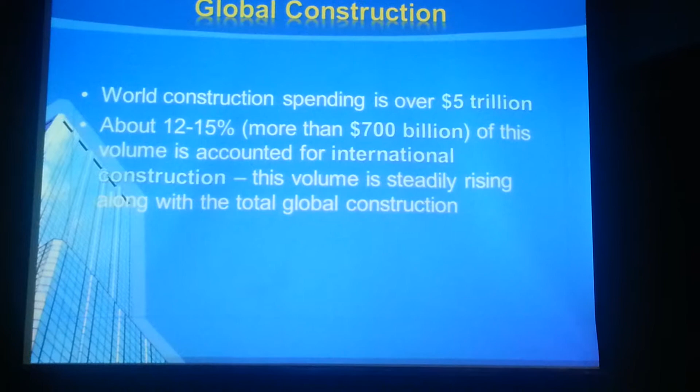Now, do you think that amount is increasing in terms of percentage or decreasing? What do you think? Anybody? Increasing. And it is increasing in this way.

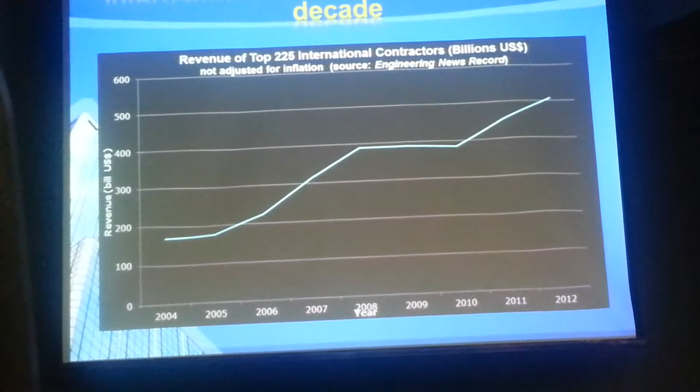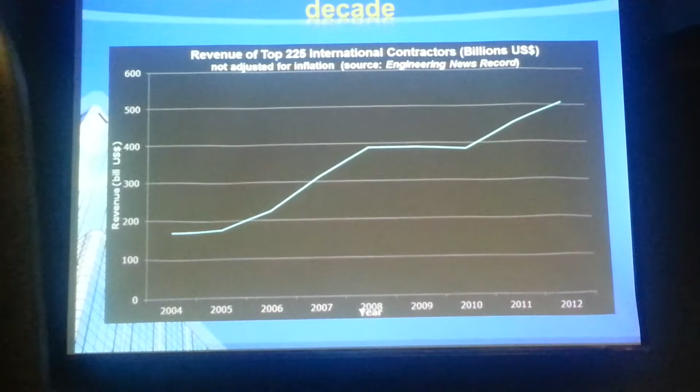I teach a course in my graduate program, Topics in International Construction. And I have been observing the trend of the volume, and this is what I've seen. And of course, I think you will know why there is a flat portion from 2008 to 2010, right?

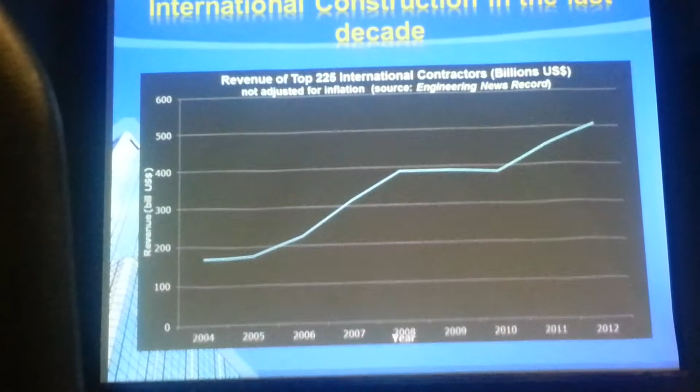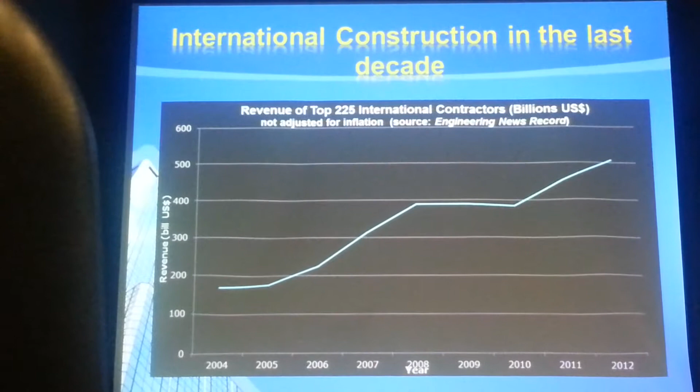There has been a global recession. But still, it didn't go down. You see that it didn't go down. These dollar figures are not inflation adjusted, which means this is the actual volume of dollars that have been spent. And it didn't go down during the recession period. And now it's going up again. And the latest figure in 2012 is about $500 billion, US $500 billion.

Why is this happening? As I asked the question whether it's increasing or decreasing, I think you agree with me that it is increasing. One of the reasons it is increasing is the push for project scale. The volume and the size of some infrastructure projects are becoming very, very large. And there have been economies other than developed countries like G7 or G8. There are other economies that are growing. For example, BRIC, and their GNP is increasing, so there are bigger and bigger infrastructure projects coming along.

At the same time, there have been breakthroughs in technology. We don't see most of that, but the technology that has been increasing that we have been observing is in the information and communication technology, which has nothing to do with construction, but it is helping construction. It is helping to undertake bigger and larger construction.

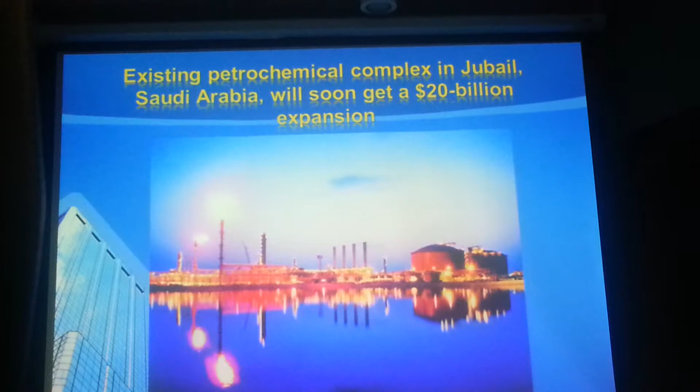I'll give you a few examples, and these examples are featured in Engineering News Record. This one is in Saudi Arabia, $20 billion project. So think about the volume in terms of just money. There are many third world countries whose annual budget is not $20 billion, but this is one single project.

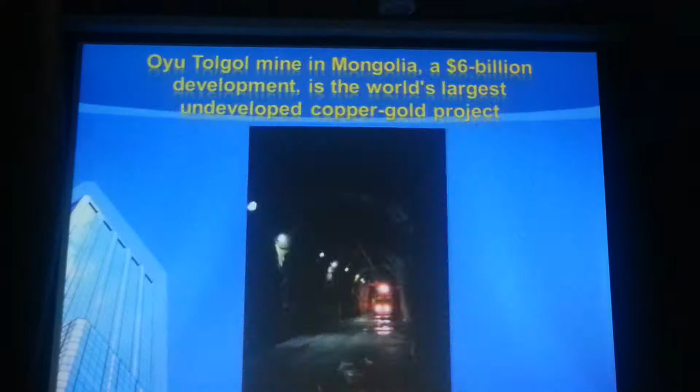There's another one in Australia, which is a $15 billion project. It's a liquefied natural gas facility. And there's one in Mongolia, $6 billion project.

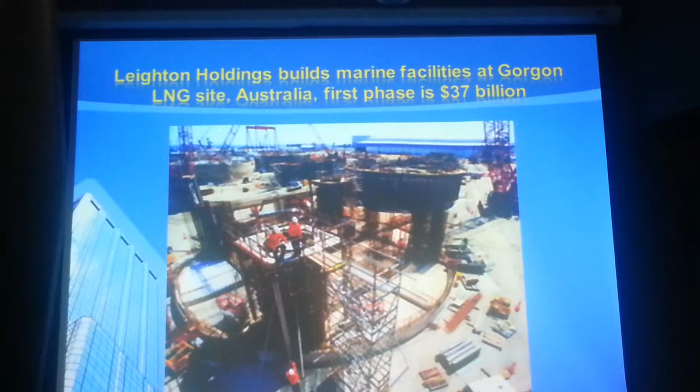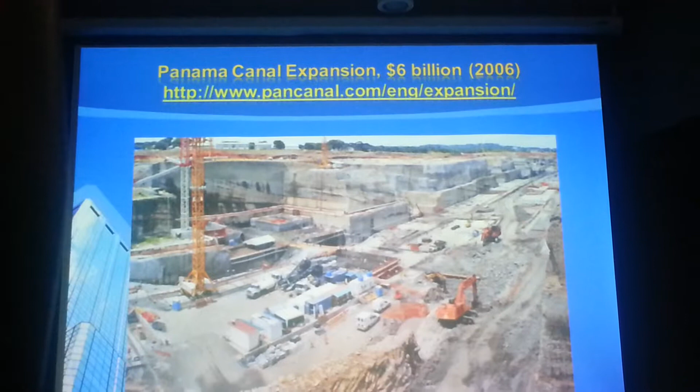This is the Panama Canal expansion that started in 2006 and is finishing either this year or next year. It's a $6 billion project.

So what role is technology playing in this? There are several kinds of technology or technological innovation that we are witnessing. Of course, I mentioned one is computing, information and communication technology, and automation. There are two different kinds of applications of computing technology. One is information, in the field of information and communication. Another is automation, maybe you can say robotics. These are the two different types of computing technology that we are seeing.

And then, of course, we are also seeing push for innovative construction materials. Now, the first two, computing and innovative materials, I want to emphasize these two words. One is process innovation, another is product innovation. I'll come back to this differentiation between process and product in construction. It's a very important differentiation.

And then we're also seeing technological breakthroughs in high-rise buildings and infrastructure construction. Some of the examples you have already seen when I talked about those giga projects. They're not called mega projects anymore, they are called giga projects. They're so big. Now, a little more contextual information.

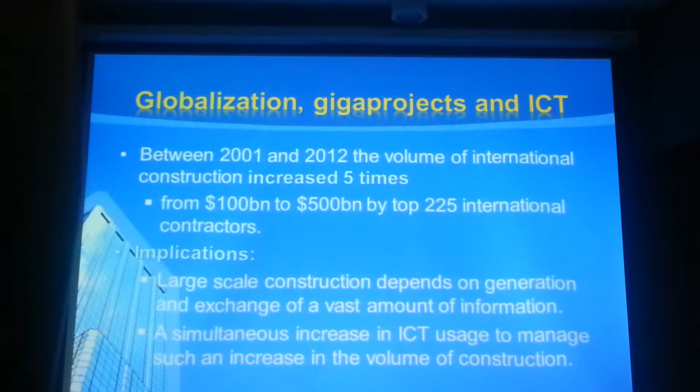What is the implication? The implication is that even if it is not directly, indirectly you can say that in a large-scale construction project, there will be more information exchanged and processed. Naturally, in a construction project, you will have to know how to generate, store, and exchange information among the participants in the project. It's very important, and that's why we are seeing breakthroughs in ICT, or information and communication technology. So a simultaneous increase in ICT usage to manage increase in the volume of construction is what we will see. So that's kind of a direct relationship.

Now, I'll give you a few examples of what we have been hearing as BIM, Building Information Modeling. Have you heard of this term? BIM, Building Information Modeling, which is a direct byproduct of information technology that I talked about. So BIM, also known as virtual design and construction, is changing everything in the way we now communicate in civil engineering and construction engineering field.

Now, you don't have to read all of these things. I highlighted some of the items there—database technologies and graphics and simulation technologies. These are very high-level computing technology, and now we are seeing applications of them in construction.

We're still not seeing very sophisticated applications, but we are seeing them, and it's increasing. We are also seeing how BIM is being used to assess the building life cycle, constructability analysis, as well as to provide a framework for an interactive information system. I'll give you a few examples.

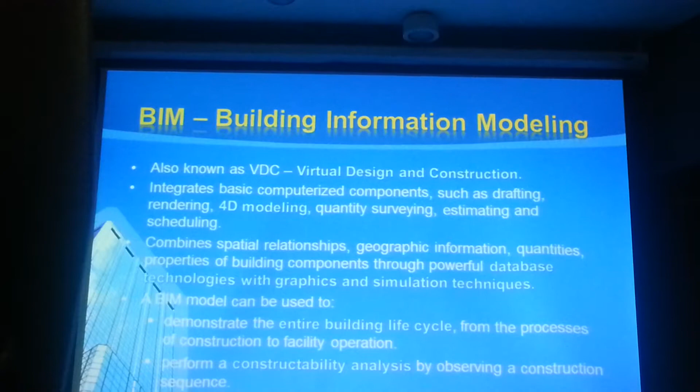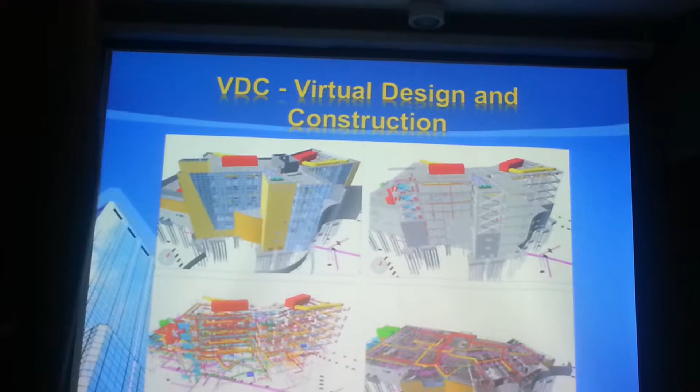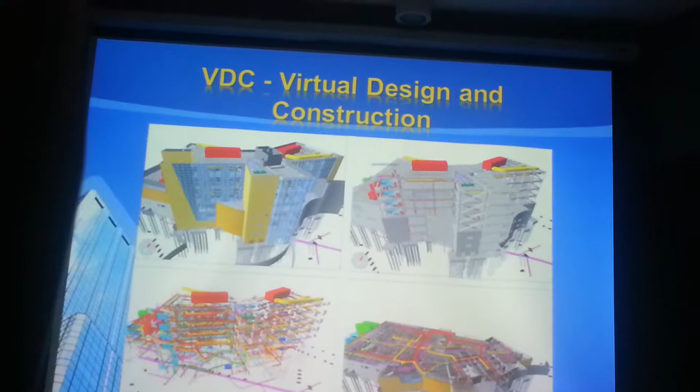So that kind of technology now we are seeing in BIM. By using BIM, even before the building was constructed, we can see visualization, collision detection, constructability review, and digital as-built documents that are kept for records, as well as sequencing and phasing, site logistics, and order.

Visualization—you see how quickly you can detect if there is any conflict during construction. That saves time, that saves money, that saves a lot of headache.

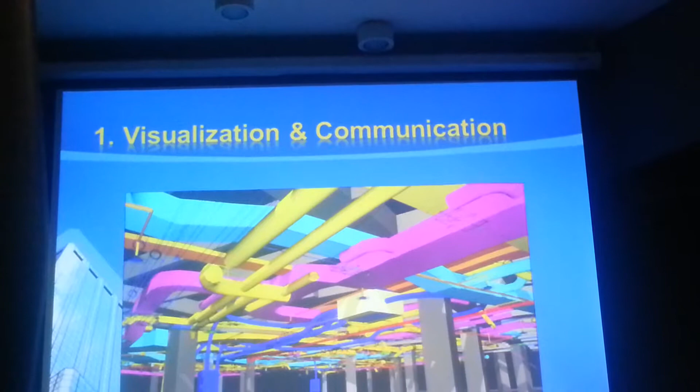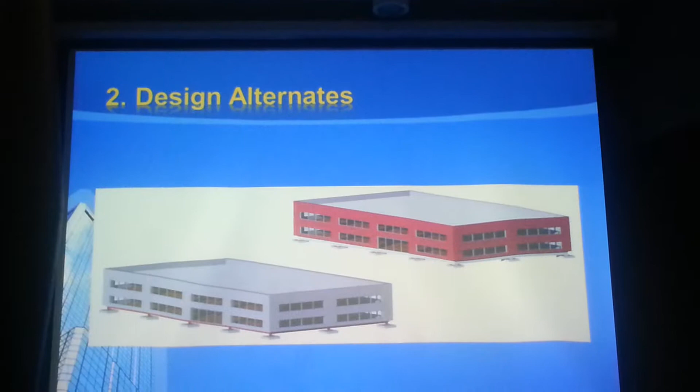You can see how choice of materials can change the look of your facility that you're going to build. Instead of describing it by different two-dimensional drawings, you can simply use this kind of technology.

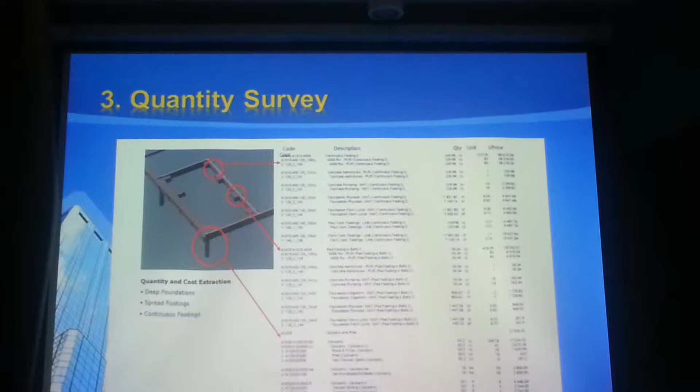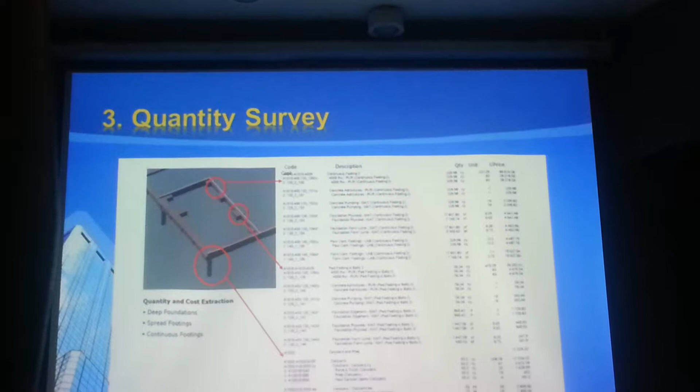Quantity survey or estimating can be automated as well. As soon as you change something in your drawing, it changes the takeoff spreadsheet. It can be linked, and this is how it can be linked as I'm showing here. You don't need to ask the estimator to reflect the changes in the design and do the estimate again—this can be automated.

Site logistics, which is another headache for construction engineers, particularly when there is limited amount of space. You can design the utilization of the space using BIM technology.

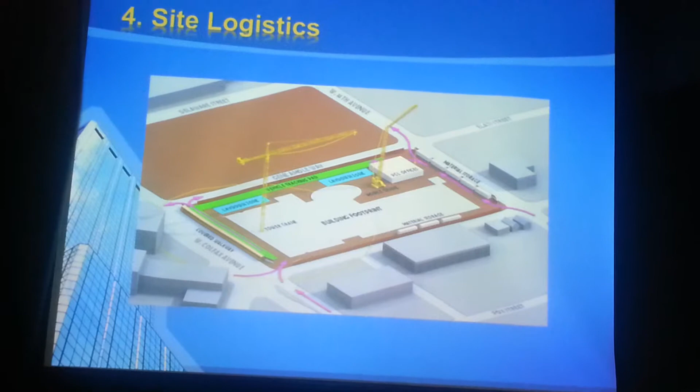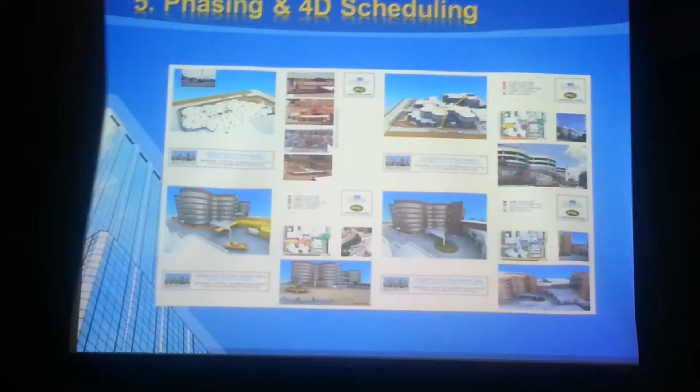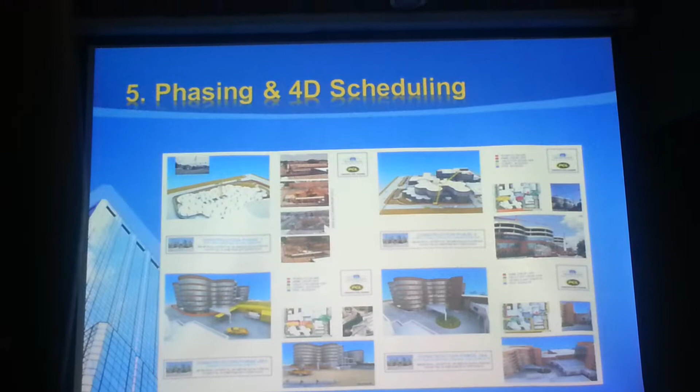4D scheduling—now, if we add one dimension to the 3D by adding time as the fourth dimension, we show progress. So this is also a very powerful tool that can be used to manage the logistics, to manage the procurement, to schedule the subcontractors and suppliers.

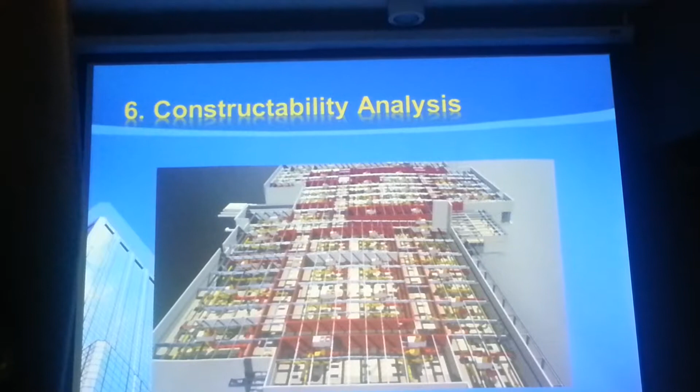Constructability analysis—again, another example of how you can phase or design the phases of construction. This one is actually not a construction example.

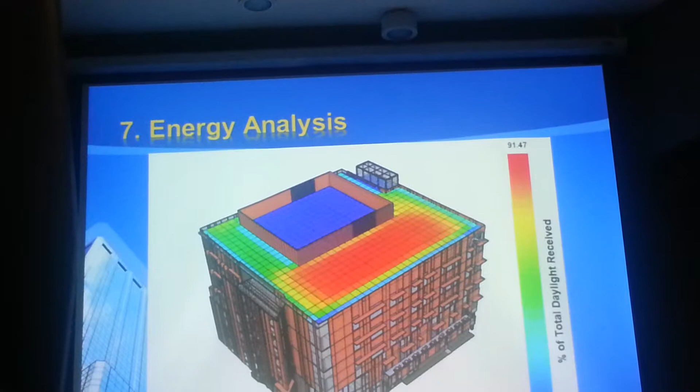This simply shows how the energy is being utilized. As a matter of fact, I have heard that there is a program that tells at any given point in time how much energy is being utilized by the buildings in New York City. By minute, by hour, you can tell the amount of energy being used in the facility, and this shows by color coding how the energy is being utilized.

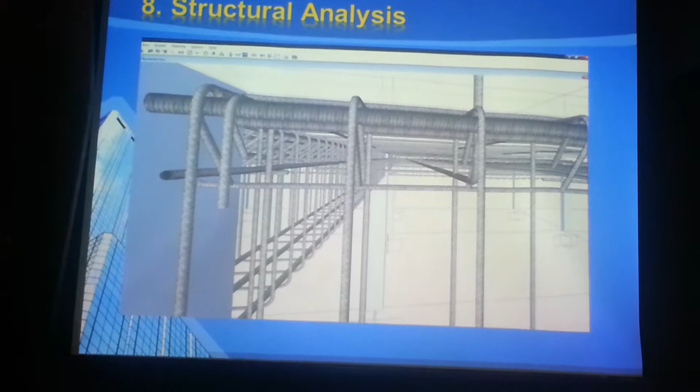Structural analysis almost looks like a picture taken with a camera, but it's not—it's a virtual drawing in 3D that shows how the rebars or reinforcing will be arranged before the concrete is poured. This will also help you detect any potential problems while doing this.

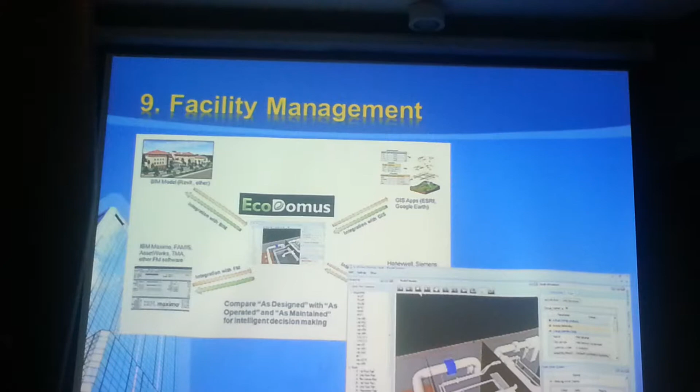Facility management, which is after construction, when the facility is being utilized—this can also be automated, the management and utilization of the facility, by using this kind of technology.

Now, BIM is not going to solve all our problems. Although you have seen very impressive examples of BIM, it's still not going to solve our problems, and that's because construction generates a lot of data.

So, last week I was in New York at the ENR, Engineering News Record, Future Tech Conference. In that conference, they did not talk about BIM at all—BIM is already yesterday's technology to them. They're talking about how to manage the huge amount of data that's being created.

Are we really using the data that's being generated in the field and bringing it effectively into the office, and then using it in the next project? We are far behind in that advancement. And analytics—how to use information, how to analyze information to be more effective and more efficient—we are still behind on those.

So you will see in the future that more and more emphasis is being placed on database technology in construction.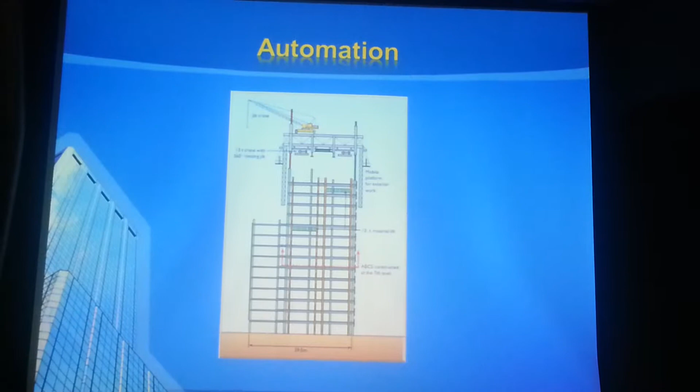The system that you are seeing here is actually used in this construction in China. This building, the way you're looking at it, actually utilized that ABCS system, the semi-automated construction system.

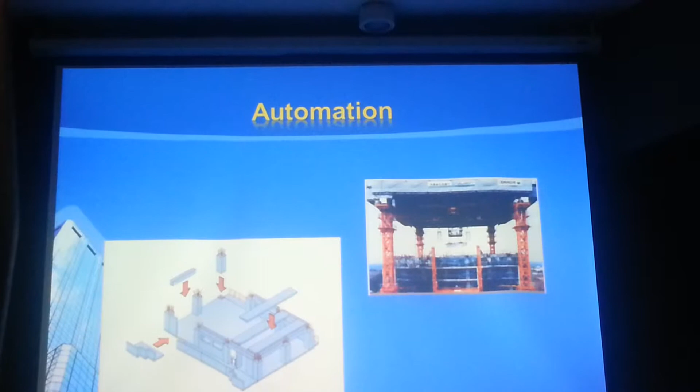So what you're seeing on the left side is a combination of using in situ as well as precast concrete. Of course, more precast concrete than in situ concrete, because if it is all in situ concrete cast on site, then it doesn't become automated. So automation means more and more use of precast elements. That's what you're seeing on the left.

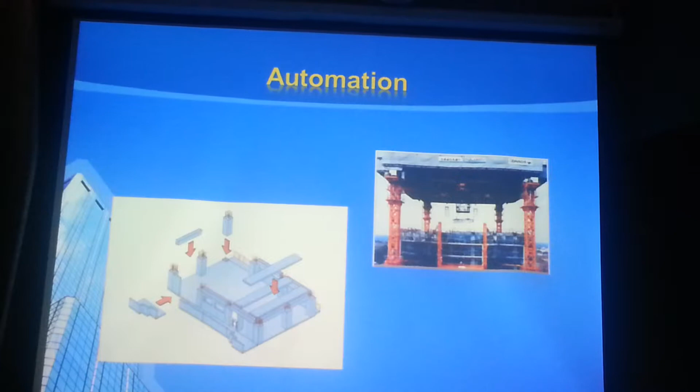Now, besides computing and automation, there are also innovations taking place in other areas. One of them is materials. And it seems to me, by looking at what kind of new materials are coming into construction, I see more and more innovations in concrete. It seems to me that we are not done with concrete. Concrete is still evolving in many different ways.

Some of the examples are lightweight concrete - we're trying to make concrete that is strong but lighter than normal concrete. We're trying to make concrete stronger by using fibers, not just reinforcing bars, but fibers - carbon strands that are thin, light, and very strong.

Translucent concrete, whereby we are seeing concrete that is see-through. You can actually see through the concrete, eliminating the need of a lot of lighting in the buildings during the daytime, and other uses. Instead of glass, for example, you can use concrete that is translucent.

Nano-treated materials, another innovation that is, I would say, still in its infancy. We are seeing how the materials' properties can be changed at the atomic level, at the molecular level, so that it can be used more beneficially in construction. I have heard of using nano-treated bamboo.

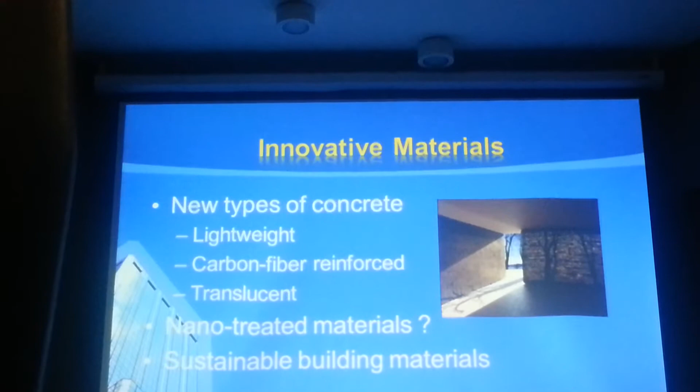Of course, bamboo is already used in many applications of construction. Bamboo is very strong, the bending capacity is very high, and in many third world countries bamboo is actually used for scaffolding because it can be very tall, 60, 70 feet tall, with a lot of bending capacity. Now they're trying to nano-treat bamboo so it can be used almost like steel.

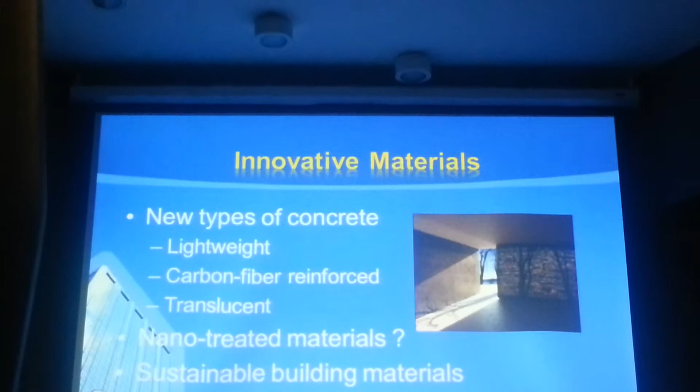So natural materials that are available, like wood and bamboo, also contribute to what we have been hearing nowadays - sustainability. We want more and more sustainable construction, use of sustainable materials. So there are efforts in using natural, sustainable materials by treating them. A lot of innovations are going on in that area.

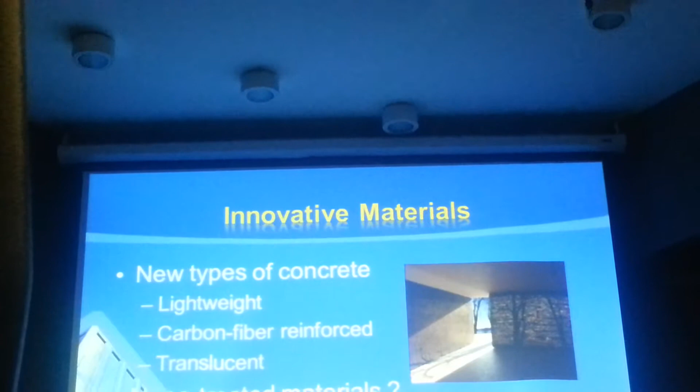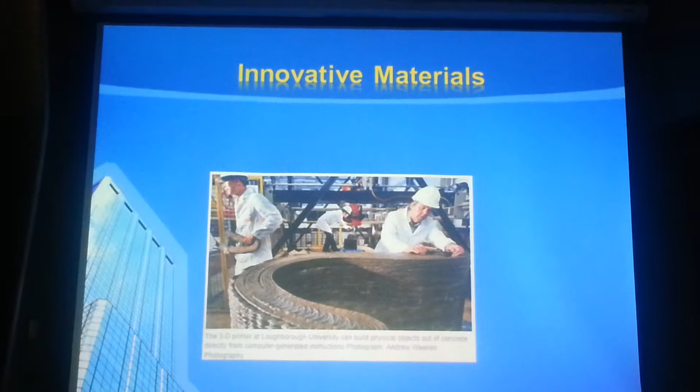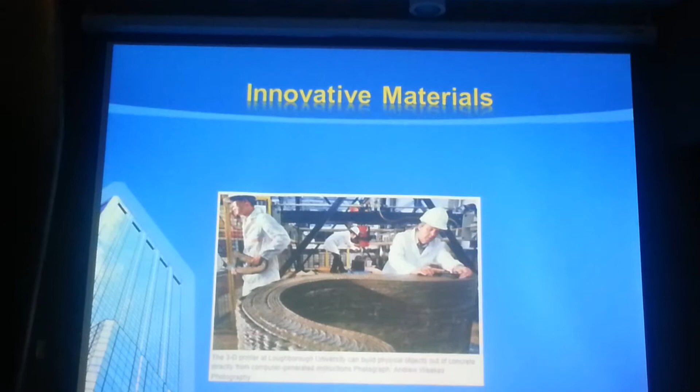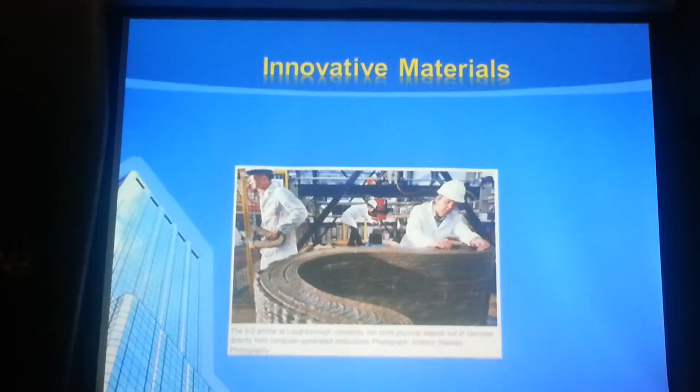So you will also see a lot of effort in this area, use of concrete - this probably can be an application of computing technology, in how concrete structures can be formed or made by using printer-like machines. Now I'm switching gears to another kind of innovation taking place.

Tallest buildings, tall structures, high-rise buildings. If you Google tallest buildings, you will see this picture come up. This is copyrighted, so please don't use this from me, take it from Google. What is the tallest building now? Burj Khalifa, which is on the left here. I wanted to point out, the latest high-rise building, the tallest building in the United States, is which one?

No. Sears Tower - now it's Willis Tower. That was built in 1974. The year is written under the building. So Sears Tower is third from right, built in 1974. After that, there has been no tallest or tall building built in the United States. Everything else is elsewhere.

The next one was in 1998, so there's a big gap between 1974 and 1998. There was Petronas Tower, which is in the middle of the two towers. Now, what is the reason you think the United States is not building tall buildings? And also why there was such a big gap between 1974 and 1998?

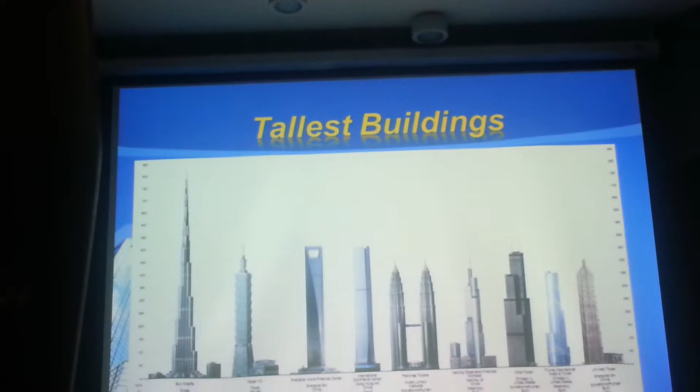Now, of course, we are seeing a surge. What do you think is happening? Technology? Not so much technology for building more - not so much need. The United States, like any other developed country, is already developed. They have already built their buildings. The demand for office buildings, tall buildings, wasn't there.

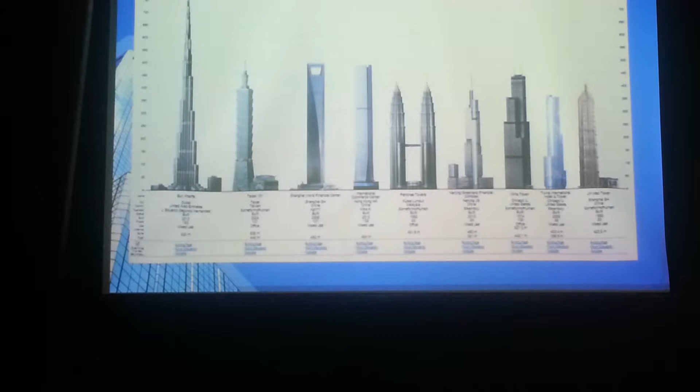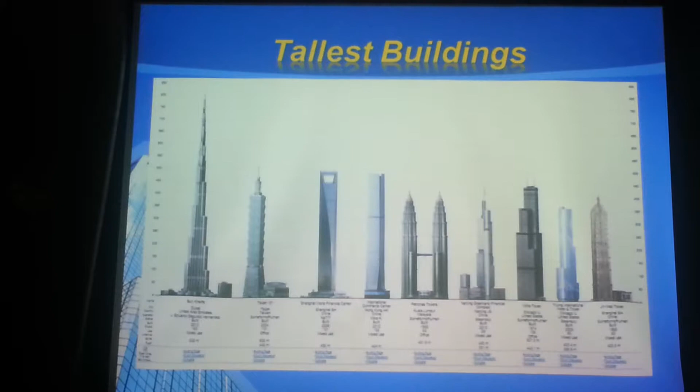But it was in those countries that were becoming rich - Kuala Lumpur, Malaysia, China, Taipei, and that's why you see Dubai. Ironically, all of those buildings have been built by the same company that built the Sears Tower, which is Skidmore, Owings and Merrill, SOM. They have contributions in all those buildings, even though they are building out there. Just a thought I am giving you: innovation depends on demand. It doesn't happen without any reason.

We are seeing some innovative applications of technology in high-rise buildings. Okay, these are the examples. I'm going to go a little quick now.

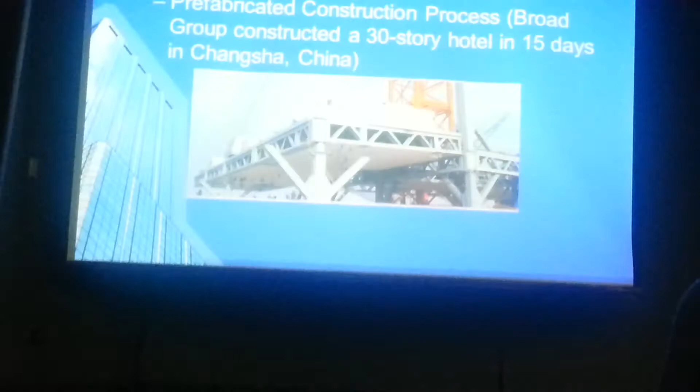The 2013 Innovation Award listed 5 technologies in high-rise buildings. One is this prefabricated construction process, similar to what we have seen before in the ABCS. This building is a hotel, 30 stories, built in only 15 days. You probably haven't heard of this. This is amazing, and it was done because of the technology.

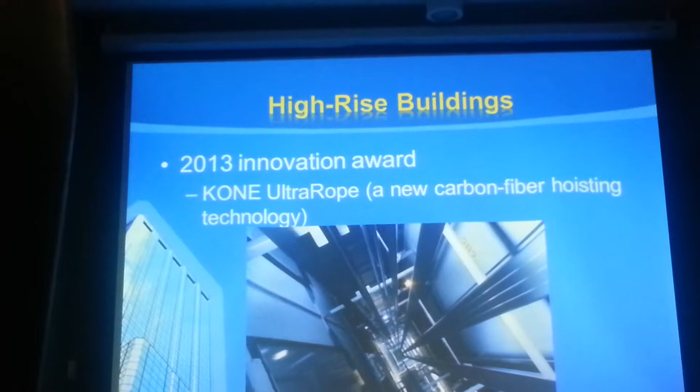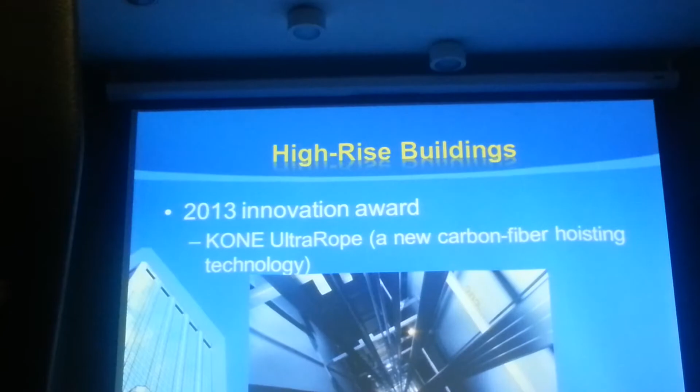This is an application of high-strength cable for hoisting, like a lift or elevator cable, and the material used allowed them to double the height from 500 meters to 1 kilometer, almost 1,000 meters.

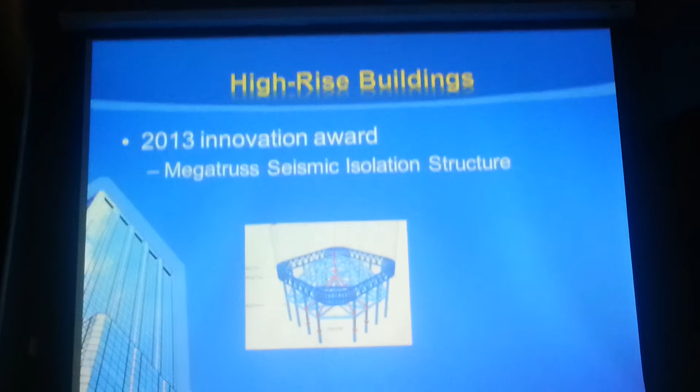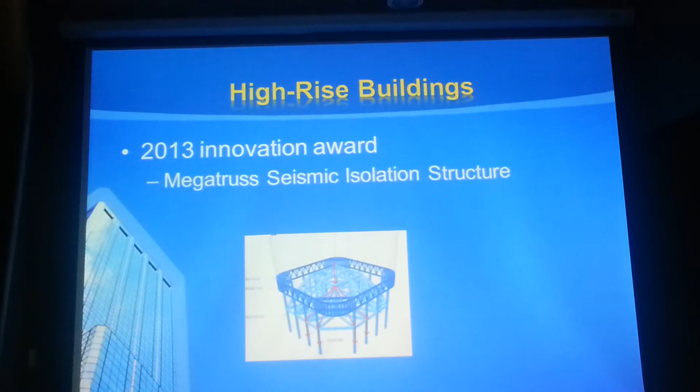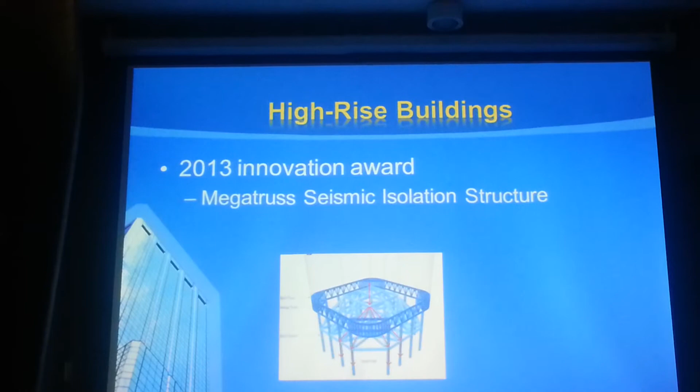This is a seismic isolation structure. Only the sketch is shown to show how two different mechanisms are isolated. This was done in earthquake-prone areas like Japan, so that very high level earthquakes will not actually damage this high-rise building. So that's another area of technological innovation going on.

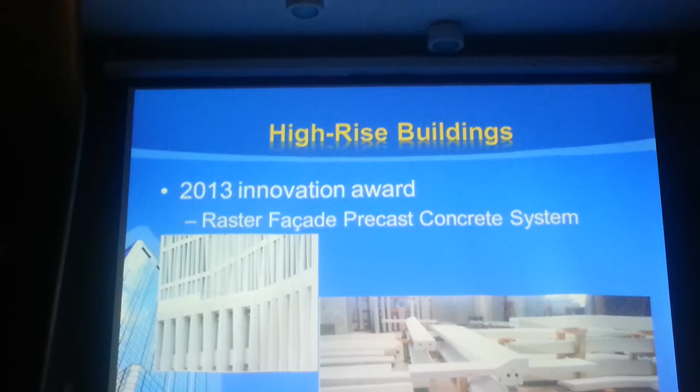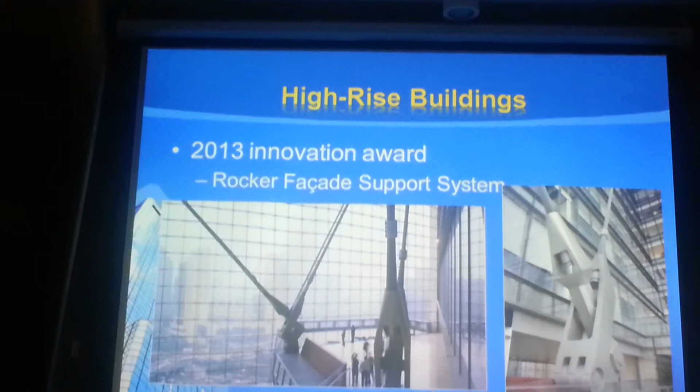This is the application of precast concrete, which is not new, but again, materials allowed them to create that kind of facade, and the elements are shown on the right. This is a very interesting example of using the technology of the suspension bridge in a high-rise building, to hold and suspend the slabs in the top story. So it's innovative in the way that technology from one type of structure is brought to another type of structure.

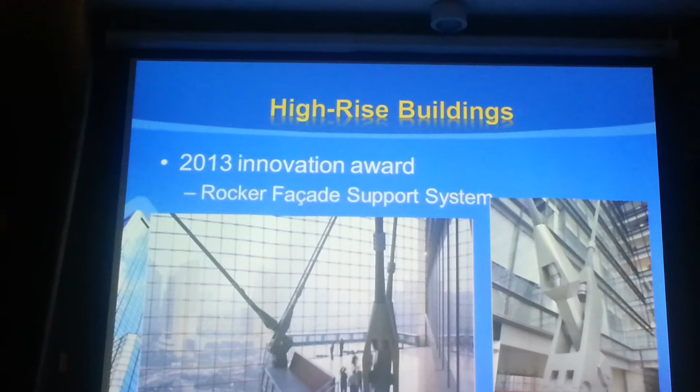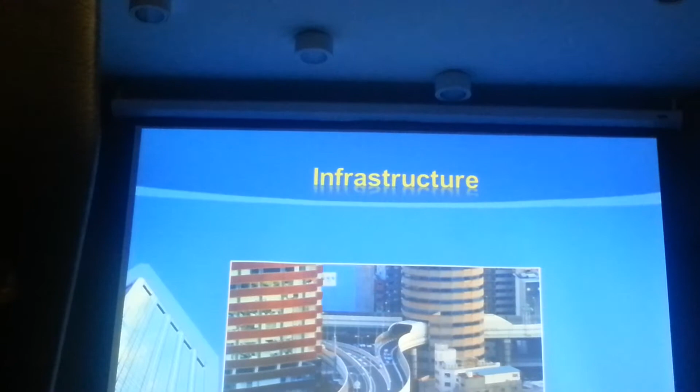Now, this is an example of thinking out of the box. You see, they didn't find a way, so they created a way within the building highway. Now, these kind of things are also innovative. You can think in terms of infrastructure, how to manage them.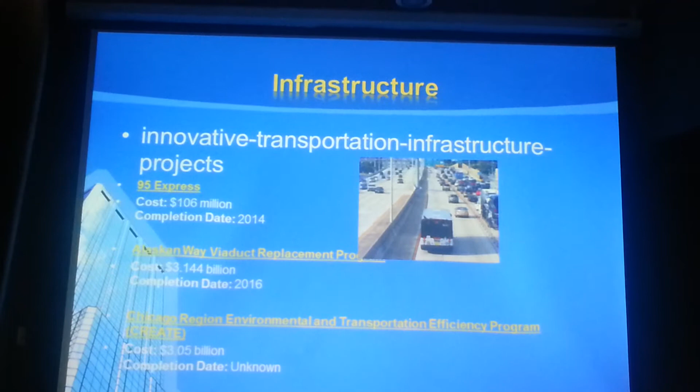Some examples of big infrastructure projects from the United States. I just listed them. This is Interstate 95 in Miami - just the volume of dollars, you can see that is going on in infrastructure reconstruction in the United States: 106 million. The Alaskan Way, 3.144 billion. This is Chicago Environmental, the CREATE project, 3 billion.

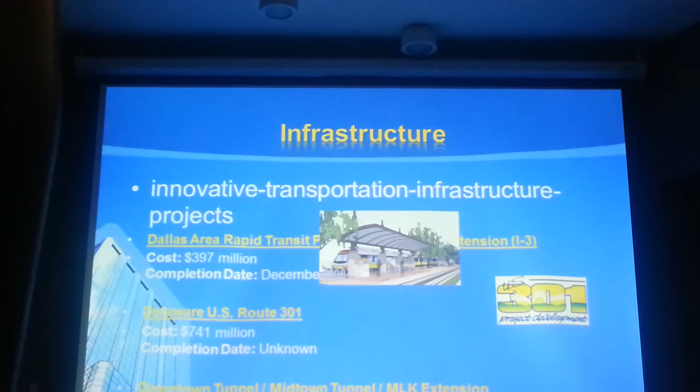There are more, I have 10 of them. Dallas area, which is 397 million. They are mostly in infrastructure, meaning road and bridge construction. Delaware, 741 million, downtown tunnel - that's actually in Virginia, 2.89 billion.

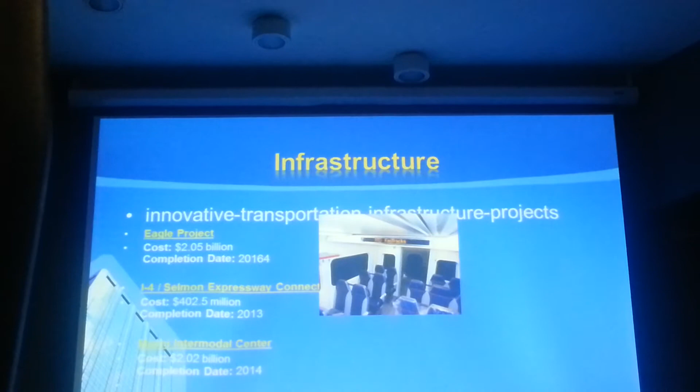Eagle, 2.05, that's a mass transit project. I-4 in Tampa, Florida is 402 million. Miami Intermodal Center, 2.02 billion. That's been going on for almost the last 10 years, near completion now.

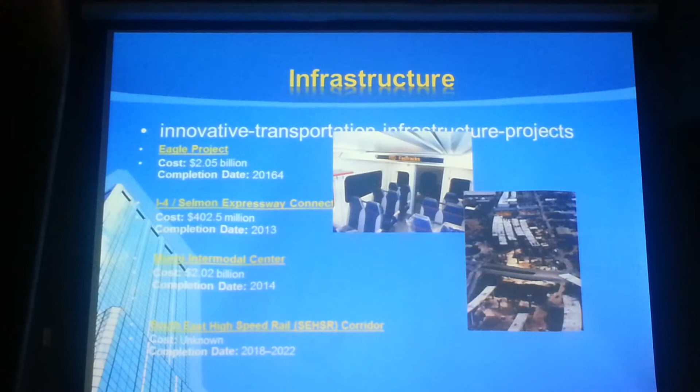Southeast High-Speed Rail in corridor also. The cost is not known on this one, but it's just starting next decade.

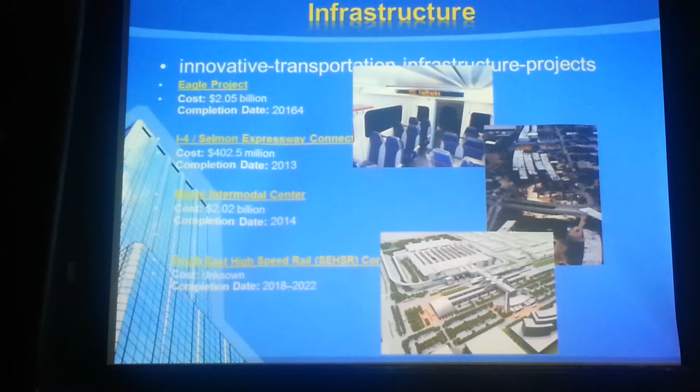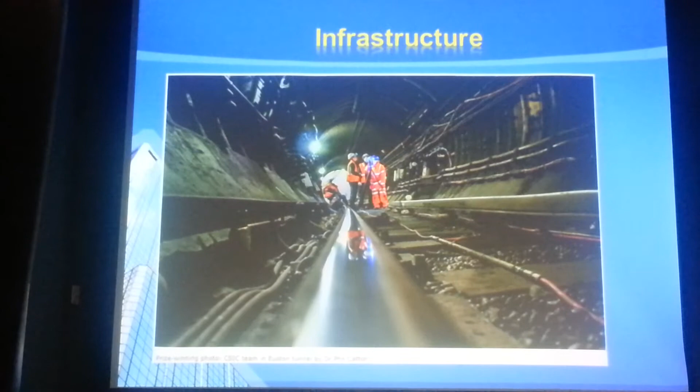This is an example of the Euston Tunnel in London. It's a prize-winning photo because of the size of the tunnel itself. Again, this kind of construction is significant just because of the size. The diameter of the tunnel boring machine itself is an innovation.

Now I'm almost near the end. I want to leave you with some questions. Challenges in infrastructure construction are threefold. One is the machinery, as you have just seen, the tunnel machine I talked about. So one area of technology innovation is in the machinery. Not just automation, but the machinery itself.

Use of sensors is another area becoming important, particularly in bridge construction. There was a question asked by a bridge engineer: we build billions of dollars' worth of bridges, but we don't put sensors in them to find out how the bridge is performing. We buy a $30,000 or $40,000 BMW, and there are hundreds of sensors in there. All you need is that kind of technology applied in civil engineering construction, and you can tell how the bridge is performing. Because we do spend a lot of money to find out the performance of the infrastructure.

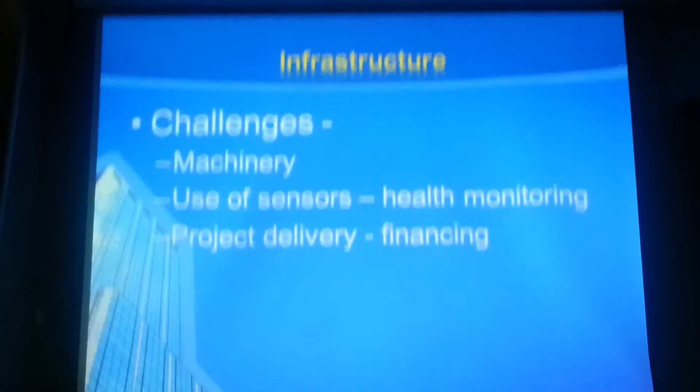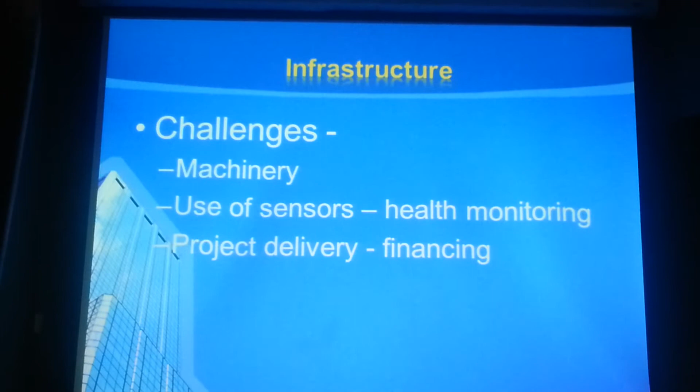So that's another area. The third is project delivery and financing. Nothing to do with the actual product, but how do you finance it. PPP—public-private partnership, build, operate, transfer, you've heard of it. These are still evolving because money is in short supply, particularly from the government side.

So how we can become more efficient in financing projects is also an area of innovation in infrastructure. Now, innovation has two dimensions, nothing else. It's not very complicated. One is risk, another is reward. Why do you innovate? Because you expect to be rewarded. And why do you not innovate? Because it's risky. It's very simple.

These two equations are very simple. So you have to be convinced that there is enough reward for you to invest in innovation, and also that the risk is manageable. If these two things happen, innovation will also happen. Otherwise, it will be difficult.

Now, who are the players, or who are the champions, in the construction industry? Basically three: owner, designer, and constructor. Now, if all of them don't work together, innovation will not happen, because risk has to be shared.

If you, as a constructor, tell the owner that you have to take the risk—if you want to do something new and you want me to do it, you have to take all the risk—that's not going to happen. So that's why it's important to know how to organize construction, how to share risk, and how to share the reward as well. That's why it's very important.

So what are the challenges given that context? The challenges are a conservative attitude. Construction engineers, civil engineers, are more conservative than their mechanical, computer, and electrical engineer counterparts. Why? There's a good reason: we need to be worried about the safety of the people. A constructed facility cannot just be constructed—we need to be concerned about the safety of the people. That's why, by nature, we are a little more conservative than other engineers.

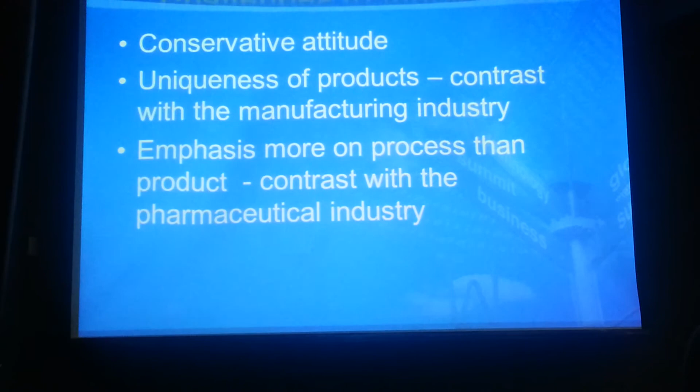I talked about the difference between products and processes. And in construction, we should be worried about products, but we are more worried about processes. That's another problem that we have. If you compare with the manufacturing industry, their main emphasis is on uniqueness of the products—the process is hidden. As a consumer, I don't know how to build a car, right? But in construction, that's not true. The construction owner who finances the project has to know about the process also, how it is built. So there's a fundamental difference.

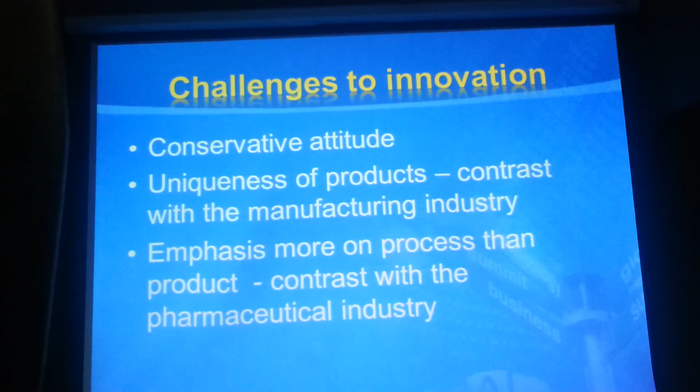There is a difference also if we compare with the pharmaceutical industry, for example. They have to be innovative just to stay in business. Construction people don't have to be innovative to stay in business—you can still construct using technology that's 50 years old, and you can still be...